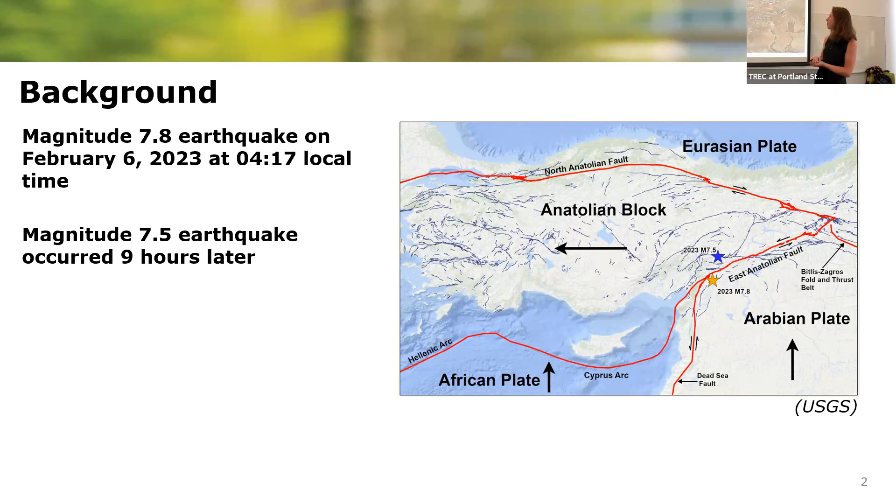So with these earthquake events, like I said, magnitude 7.8 and then 7.5 nine hours later, and in addition to that, numerous aftershocks. Here I'm showing the faults that ruptured and where they are in the context of Turkey, which is outlined here.

Seismology is not my background, but one of the big takeaways I've garnered from reading and listening to presentations on this is that this is very much an unprecedented event. Some folks consider this a main shock and an aftershock, but really it's two major earthquakes that occurred very close to each other.

When a rupture occurs, the first rupture, the 7.8 event, started here and then propagated in either direction, north and south. The second event on this fault up here propagated kind of east to west. I'm not going to get into it today, but the direction of propagation along these faults does affect the seismic response, which is something that gets considered when evaluating earthquake hazards: what are the different rupture scenarios we can have. If we know there's a fault and the type of fault, where is that rupture going to initiate, and then how is it going to propagate?

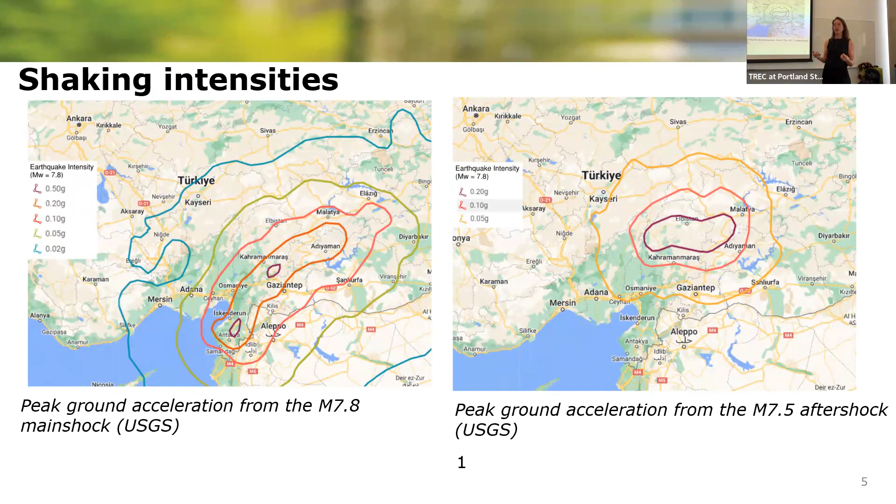This is the second event, which was more centered around Kahramanmaras and in the north part of Turkey. The bottom line is that there were some areas that just had one strong shaking event, and there were some areas that had two very strong shaking events.

So I have to touch on just the extent of loss of life and damage that occurred from these earthquakes. It's just under 60,000 people in total that died, both in Turkey and Syria. I took those values from Wikipedia, so I don't know how vetted they are, but it seems to be in line with the way the numbers were marching up in the days and weeks following the events.

There were widespread ground failures, liquefaction impacting structures, bridges, lifelines, ports, and dams. I'll be touching on a little bit of this, but we saw on those maps the large extent where the severe shaking took place, and so damage was spread throughout Turkey and Syria.

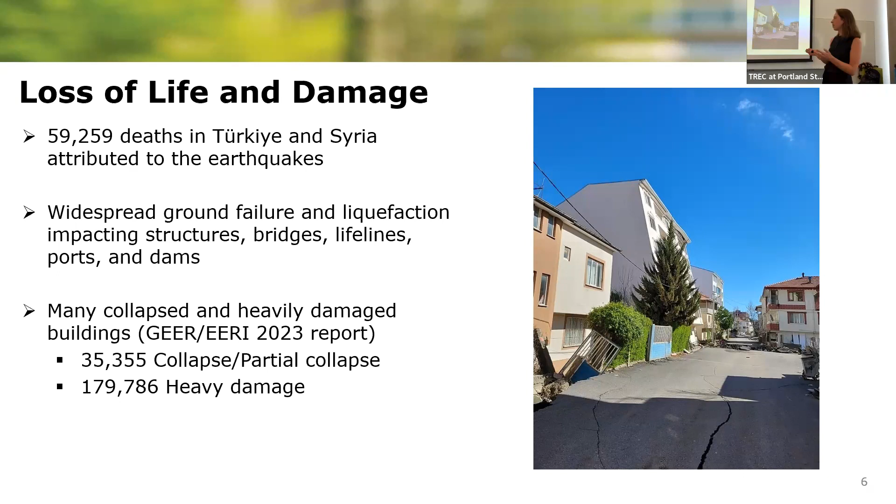The reconnaissance efforts I was part of belong to a group called the Geotechnical Extreme Events Reconnaissance Association, GEER, in partnership with researchers at Middle Eastern Technical University and the Earthquake Engineering Research Institute, EERI. GEER focuses on the geology and geotechnical aspects. EERI does a more comprehensive effort looking at impacts to hospitals, lifelines, and transportation structures, and does a very nice job of pulling together the different disciplines to understand the full effect and full impact of these earthquakes.

GEER sent three teams in the days and months following the earthquake. The first team is a small team that goes in within about the first week after the major response has happened, to get a big overview of what's happened, and then sends in the second team to do more detailed measurements. We were part of the third team, which can again pick up even more detailed measurements.

The idea and the goal is to collect perishable data on ground failure, infrastructure performance, and fault rupture that will create case studies for engineering, which are the basis of our engineering practice, so we can learn from these events and inform future practice and design. So we need to get there fast, when it is safe to do so and when we're not impeding emergency response efforts, to collect this data.

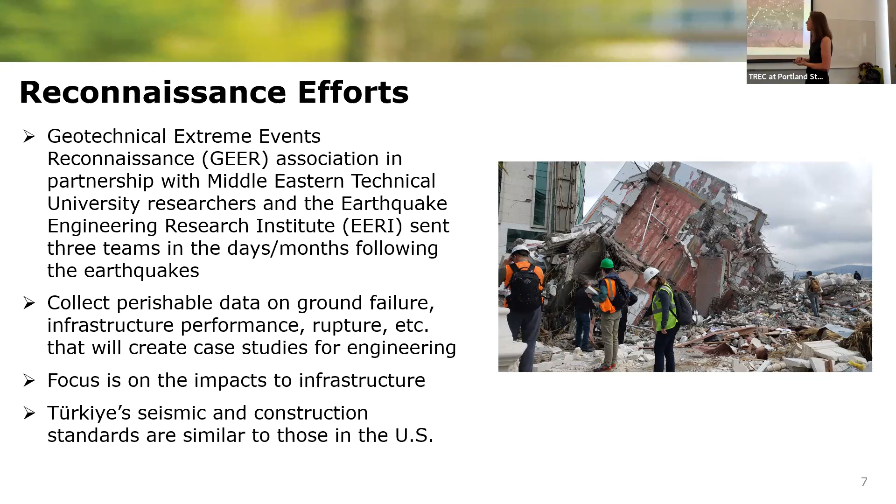This is our team, made up of 4 folks from UC Berkeley, Ohio State University, and Sena, who is from Zeytaş Engineering in Istanbul.

We focus on 3 areas: Iskenderun, where we spent about 3 days down on the Mediterranean Sea; Antakya, down south, which was covered quite a bit because there was a lot of structural destruction in the city, quite widespread and quite impacted; and up north in Gölbaşı, where there was a lot of liquefaction and interesting things we can learn from that city as well.

So what I want to do today with this presentation is provide some observations of geotechnical, transportation, and seismic interactions that we observed. This was just a few months ago, so we're still processing and learning lessons from these earthquakes. For the most part, these are very preliminary.

We're also planning to go back to collect more data from the subsurface that you can't really collect when you're there with just a week's notice trying to gather as much perishable data as possible. We plan to go back to collect data that isn't at as high a risk of being lost, but is still very valuable for understanding what happened during these earthquakes.

I also want to highlight some novel geotechnical earthquake observations, things we haven't seen or rarely see, and relate these back to how we can think about earthquake risk and planning in the US, particularly in the Pacific Northwest, some parallels between Portland and what we saw in Turkey.

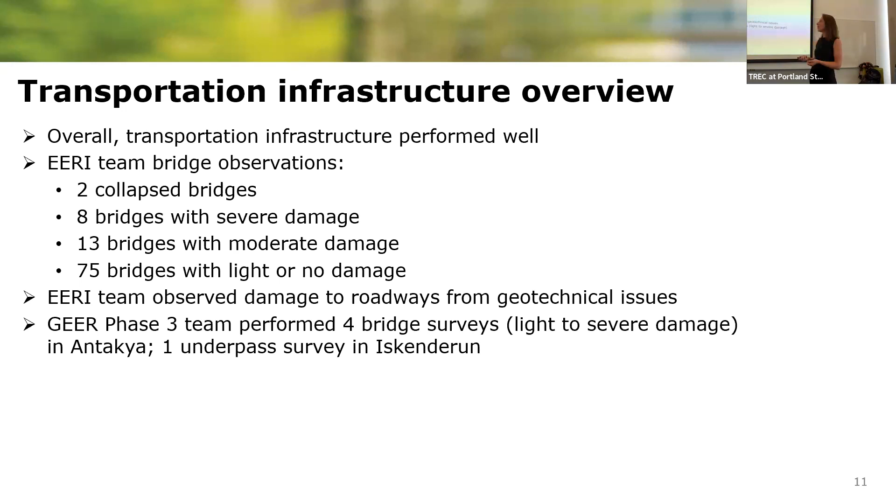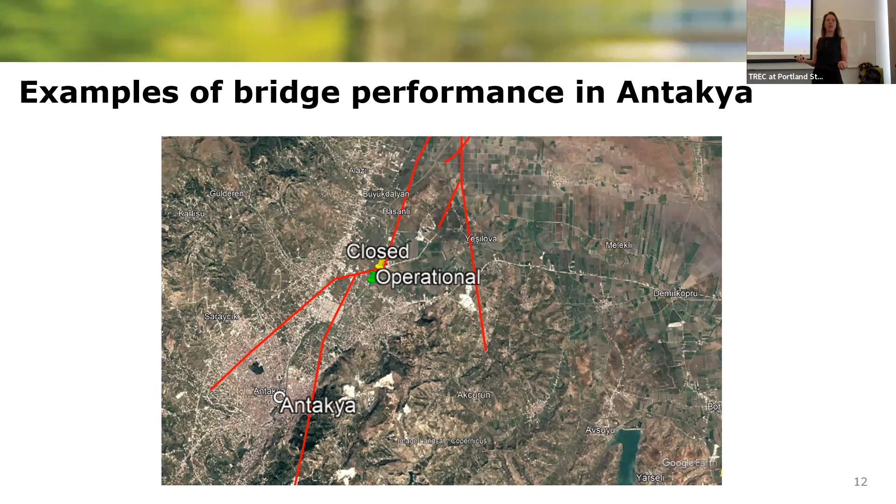I chose to highlight 2 bridges near Antakya to start, one that remained operational in the days following the earthquake and one that was closed, so we can compare their performances. This is the operational bridge, on a fairly major roadway into Antakya, with a twin bridge alongside it. They seem to have similar design and construction between the two bridges.

This is the survey we did at the bridges, with various measurements—it's a lot to absorb right now, and I don't expect you to take it all in, but I'll highlight some things. This is an image from Google Earth. At the abutments onto the main deck of the bridge, there is road patching that took place. It's quite common to see—I'll show several examples from different bridges—where the approach abutment settles during the earthquake, making it so vehicles can't move across. If there's a quick response of patching, the bridge becomes operational, as long as that's one of the only issues, or the other issues remain minor.

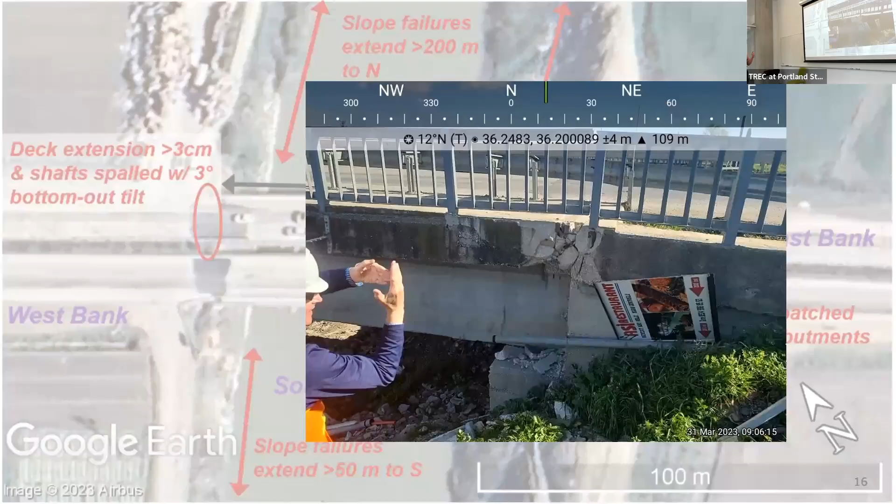With this bridge, we also saw compression of the deck and the abutment moving into the deck. It remained fairly minor, and as you can see, this bridge is operational.

We saw slope failures—we're talking about geotechnical engineering here—both to the north and south of this abutment, on either side of it. We can see the slope that moved and failed on either side, which puts force onto the abutment and causes part of that rotation and compression of the abutment and bridge deck.

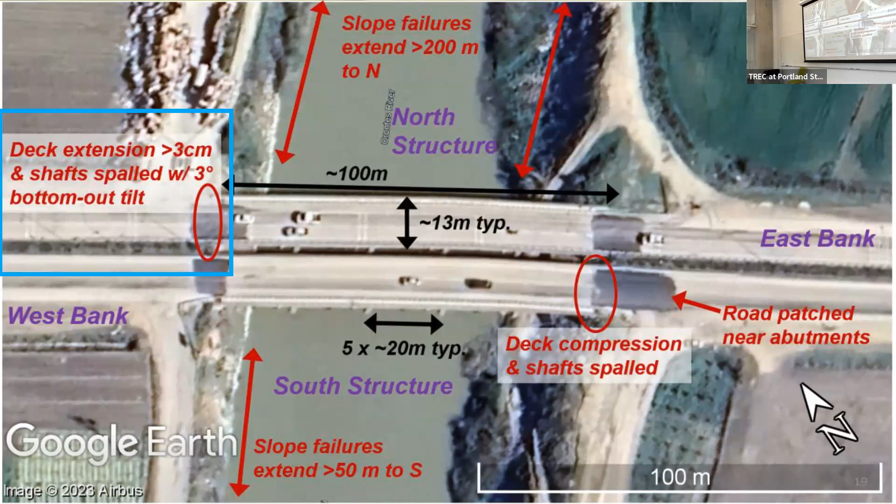There was deck extension and shafts with spalling. These are the shafts, part of the foundation of those abutments. We saw damage and concrete spalling at them, and then also some compression and tilting of the abutment and deck. But overall, this bridge did appear to perform fairly well and was operational in the days since.

This is the second bridge that we went to, fairly close by, so a similar seismic demand at this bridge. This bridge is the one that was closed. Also a twin bridge on the other side, similar construction and design. What I'll point out here is that it was very close to the stadium in Antakya.

This stadium, you can see in the parking lot here, this was taken in the days following the earthquake. It became an emergency response base and a place to house displaced people. Having this bridge closed and not operational was, from my perspective, an issue for moving people and goods in and out of the stadium. There became quite a long route around that they had to take to get there. And you also saw people just crossing barriers, saying it's just faster to go across this closed bridge. So there are still these impacts to people and movement that we saw in the days since.

Surveying happening at the bridge as well. Like I said, it was closed, and we did see the structural issues for it being closed. These appeared to be mostly structural reasons for closing the bridge. The geotech impacts didn't seem severe. It just seemed like the bridge was shaken very hard and wasn't able to withstand that shaking.

You see the structural elements here that failed. The struts across the bridge were compromised, and the structural components were compromised on the bridge. There are also bearing pads beneath these struts that sit between the abutment and the strut. During the shaking, a lot of them seemed to be displaced, and in some cases were just spit out of the bridge and were on the ground. So it was just concrete on concrete.

There were some geotechnical issues at this bridge where we did see again some slope failure along the river. You can see the leaning transmission towers in the background, indicating that the slope did displace and had rotation. Then just at the bridge, there were other things we surveyed, like a drop between the deck and the abutment and a gap between them. You can see the displacement and the offset here.

This bridge does show us where there were some geotechnical issues around it that, at this point, I can't say whether they contributed to the bridge's poor performance. Actually, I think I can say there are some — we do see these geotechnical failures that are then impacting transportation infrastructure.

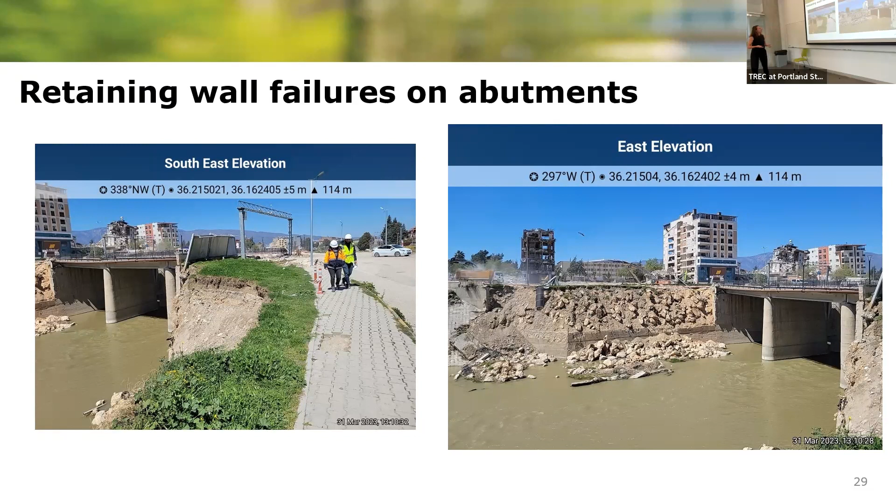Again, the drop between the abutment and the deck, where if everything else is performing well and then this happens, you are not getting vehicles across the bridge. You can see that there's almost like a makeshift approach developed here in a lot of cases. And interestingly, we did see these kinds of efforts undertaken where there was collapsed building and rubble covering a road, and folks just kind of create their own road across that rubble.

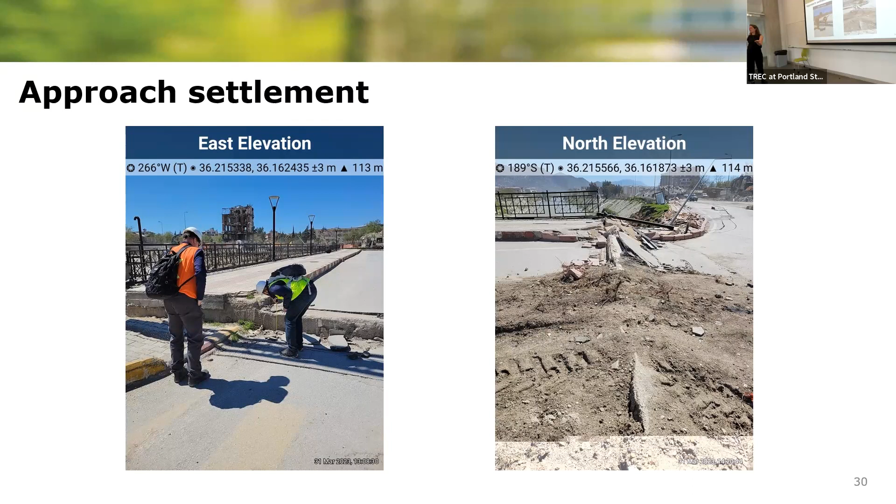This is another bridge that actually we didn't survey. We didn't go to this bridge. It was too close to the Syria border for US citizens or permanent residents to get close to. But a contact I have at the Canadian reconnaissance team, they did go survey this bridge.

And this bridge is a case where it looks like geotechnical failures can be tied to the performance of the bridge. I'm going to explain what liquefaction is in a moment, but just these sand boils here are an indication that liquefaction took place and that it is a contributing factor to the performance of the bridge.

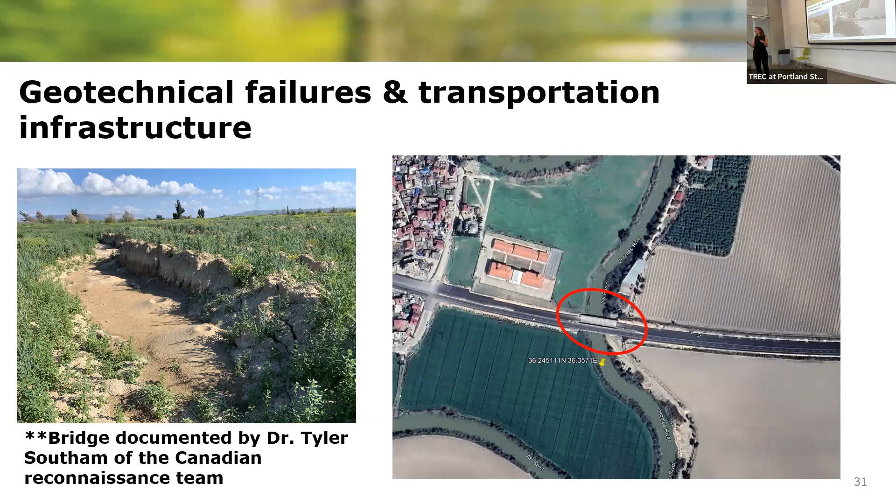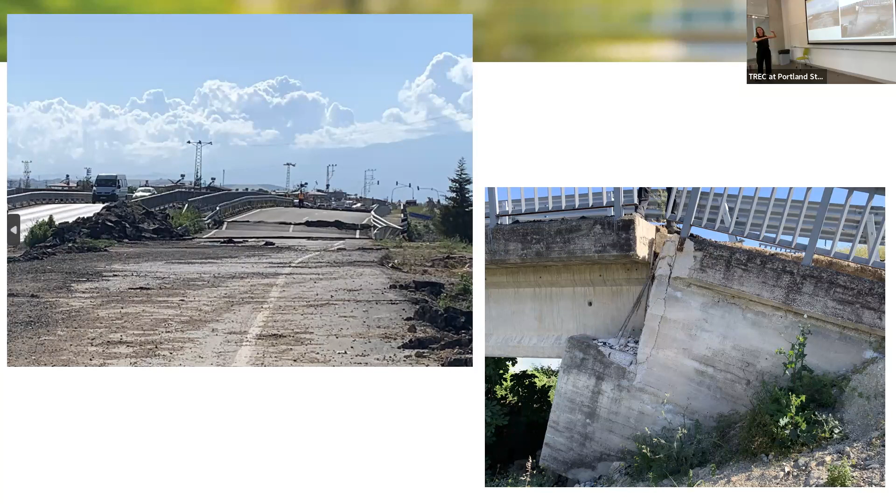And then this is another picture of the bridge where you can kind of picture that the failed slope has moved into the bridge and caused all that force and loading that then failed it. And this is looking at the approach and the abutment, the tilting of it. So that's kind of what I have on bridges for the most part.

What we saw in Iskenderun: widespread liquefaction, lateral spreading. Like I promised, I will discuss liquefaction in a moment. It induced building settlement. We saw an increased flood hazard post-earthquake, many collapsed buildings, and damage at the port facility. And I'll discuss all of these.

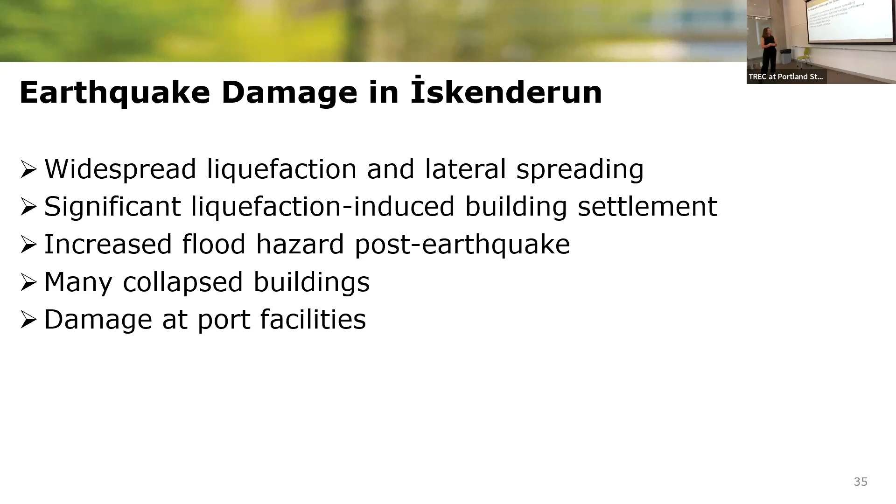So what is liquefaction? When we have sand that is loose and saturated with water, during earthquake shaking, that sand wants to get denser. You think of a jar of coffee beans, you want to fit more coffee beans in it, you shake that jar, those coffee beans settle, and now you can put more in there. Same thing happens with sand when we shake it in an earthquake. That sand wants to get denser. But earthquake shaking happens so quickly, and there's water in the way, so it can't get denser. You can't compress water. Water doesn't have time to flow out.

So instead, those particles, instead of actually getting denser, they just end up suspended on the water. They're putting their weight on the water. So no longer do we have sand particles against each other, developing strength. Now they're just on water. Water does not have shear strength and it just flows. And our soil acts the same way. It flows and it acts like a liquid. It no longer has shear resistance. So during liquefaction and earthquake shaking, soil completely loses strength and stiffness.

And I have a demonstration that I like to use. It's just a bucket of sand full of water. There's a brick on it, just like a building. Oops. And actually, I might need to trigger this. Yeah, so the hammer comes along. The hammer is the earthquake. And you can see in the bucket, you see water coming to the surface. You see that sand kind of acting like a liquid, and our brick building is settling and tilting.

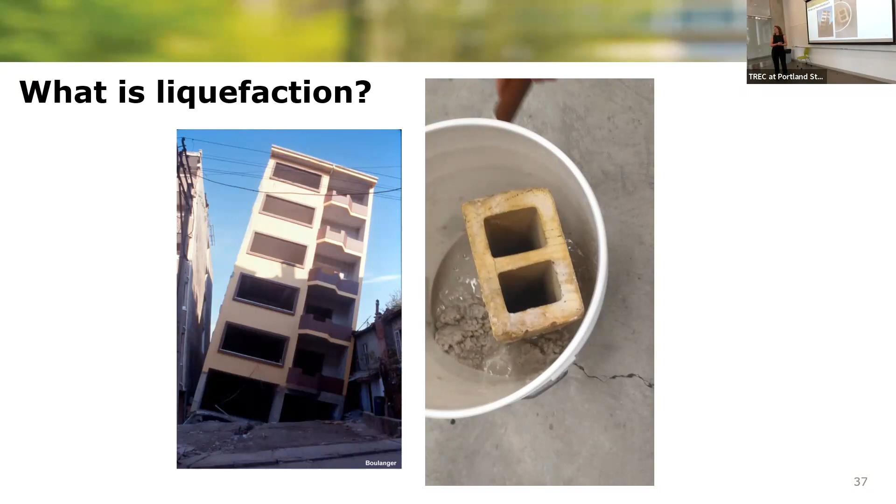So what do we see when we see liquefaction from an earthquake? We see sand boils and surface water. We see lateral spreading where soil loses its strength. So if it's on a slope or there's a river nearby, it just flows out that way, there's no longer resistance. The sand boils are because at depth, that sand or that soil becomes like a liquid and it wants to relieve pressure. It flows upwards, takes the sand with it. So this is a sign we often get that there was liquefaction in an area.

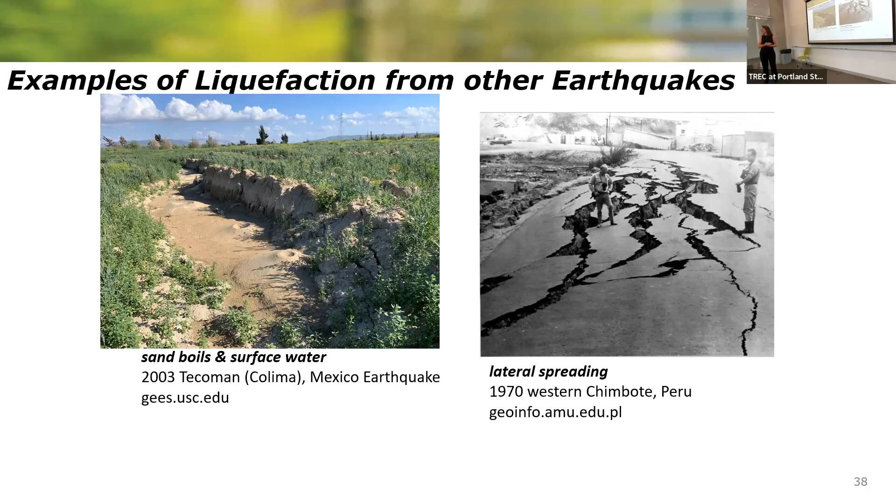And remember at that bridge down by the Syria border, there were sand boils - evidence of liquefaction that occurred at that bridge. And we saw lateral spreading at that bridge impacting the structure.

More examples of liquefaction from other earthquakes. I feel kind of silly including these slides because there's plenty of examples from this earthquake, but I hope this shows you that this is not an isolated phenomenon. Liquefaction happens during earthquakes, and it is something we need to be concerned about here in Portland in the Pacific Northwest.

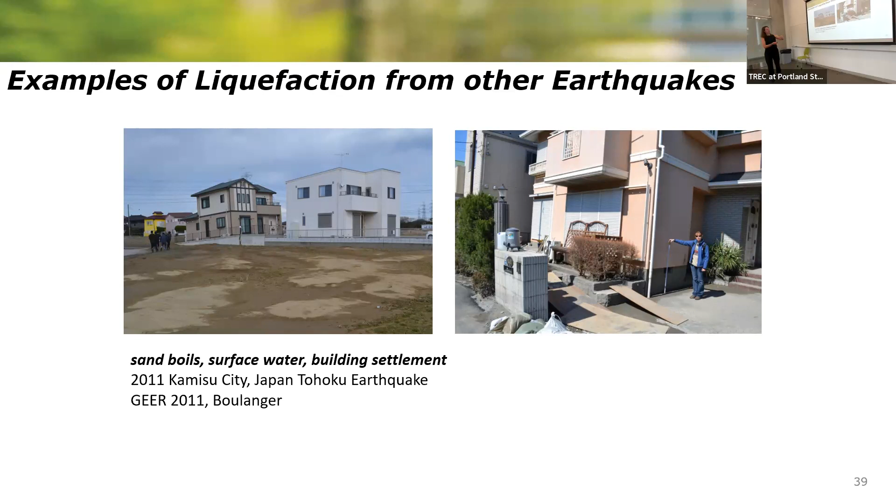These are from the 2011 Tohoku earthquake in Japan. You can see widespread liquefaction ejecta that occurred in this residential neighborhood, and you can see the tilted house in the background. This is showing a house that settled, or the ground that settled - it looks like this ground settled relative to this house.

Bridge failures from liquefaction - there's several classic examples of it, from 1964 in Niigata or 1995 in the Kobe earthquake. And actually there's several from the 2010 Chile earthquake. There's several examples.

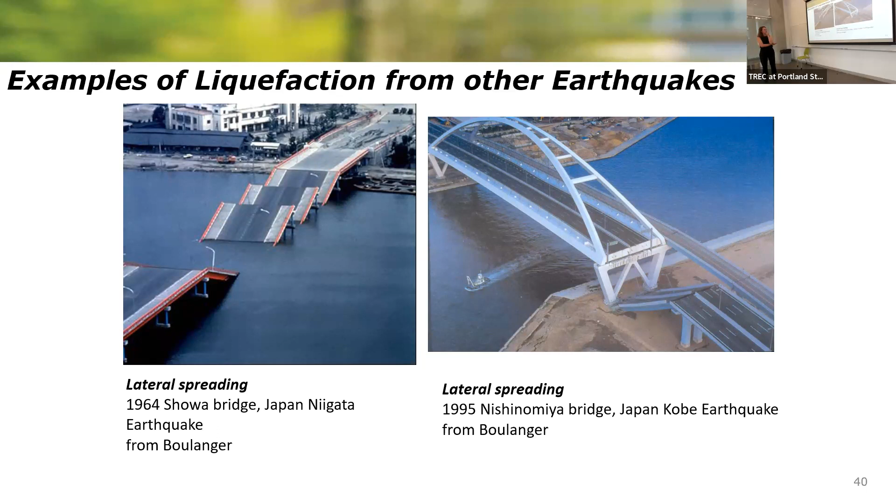So back to this earthquake, back to Iskenderun. I mentioned that Iskenderun is a port city. It was largely developed in the 20th century; prior to that it was still a port, but it was described as a very swampy city, difficult to settle and difficult to live in because of poor drainage in general. As part of the development in the 20th century, they built drainage canals, drained the city, filled in that land, and then also started to build out the shoreline to really build up this port city.

I like to include this example to show that development. This is a building that we surveyed during our reconnaissance, I think built in the 1930s or so - you can get a sense of the age of the building, sitting on a major boulevard in Iskenderun that runs close to the coast. This is the same building back in 1960. Oh, I guess the building's older than I said.

Anyways, back before Iskenderun was really developed, you can see that it's on the old shoreline of the city. So that shoreline has been built out and the land has been pushed out in Iskenderun.

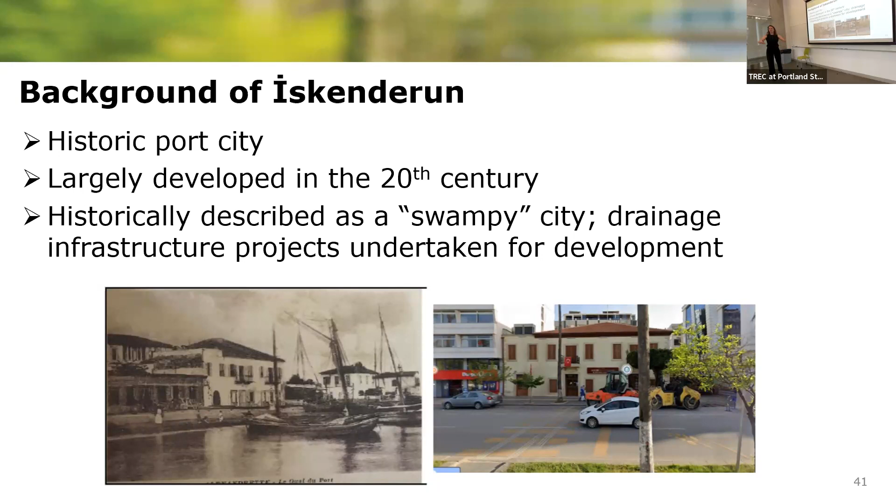This is an overview of the areas that we surveyed. The takeaway from this figure is the hatched area - based on historic maps like this one, this hatched area all along here is our interpretation of where the land has been built out and where they've extended and put fill down for development.

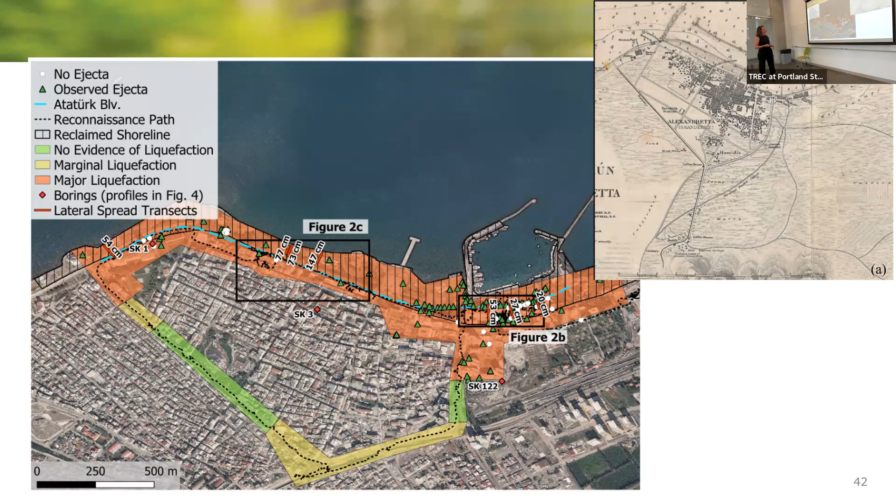Why I want to impress on this reclaimed land is that in the red zone is where we saw a lot of liquefaction, and the symbols are where they saw liquefaction ejecta. So on reclaimed land we'd expect very poor performance for liquefaction, and our observations in Iskenderun were consistent with that. We saw a lot of building settlement, a lot of liquefaction and ejecta, consistent with the historic shoreline and reclaimed land.

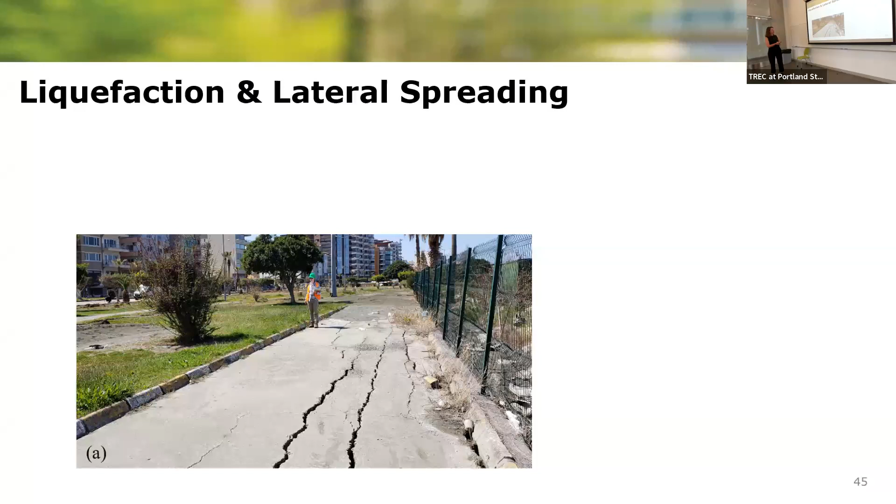Some examples of liquefaction and lateral spreading - we saw damage on sidewalks and roadways. These are pictures of lateral spreading and damage to roadways, ejecta that covered large areas of land. These are photos, I believe, that one of the first teams got from residents in the area. You can see the ejecta was very widespread - it covered roads and prevented mobility and response in the hours following, just with the amount of liquefaction ejecta that covered the roads.

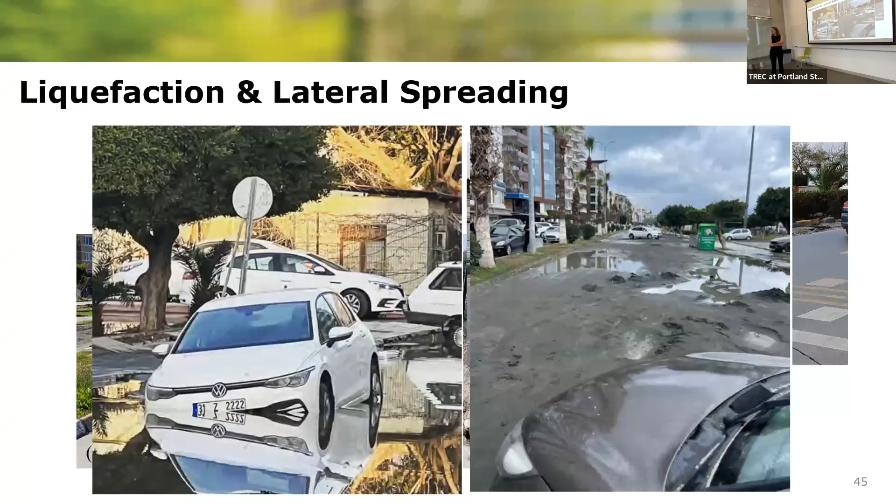Then there's the port of Iskenderun, the second largest port in Turkey. There was quite a bit of damage at the port. Ejecta and lateral spreading were observed, so we do know that liquefaction occurred at the port.

The port did not function for a period due to misalignment of the cranes. There was also a very large fire in some of the cargo containers following the earthquake, reported on by several news sources. You can see that on Google Earth as well, with imagery showing when the fire started and when it had been extinguished. So ports are something we do need to consider as a geotechnical challenge for earthquake performance.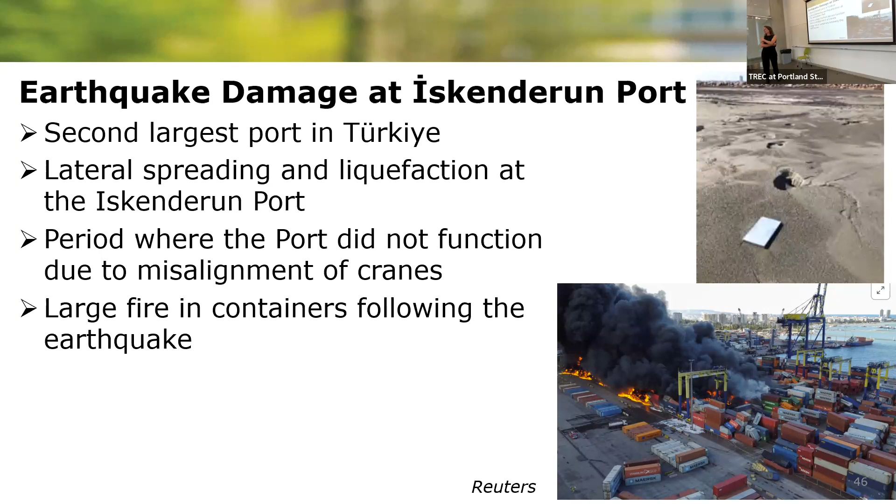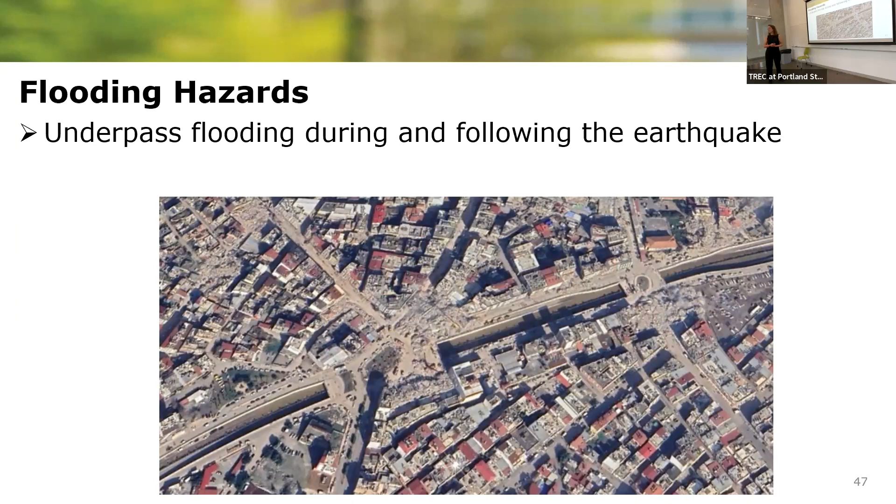There was also an underpass in the south part of Iskenderun. In Google Earth, we saw that it had flooded in the days following the earthquake—you can see the water at the bottom of it. Our thought is that liquefaction occurred at depth. It didn't really impact things at the surface, but that pressure relief and buildup of water relieved itself in this underpass, limiting transportation due to flooding. We surveyed it while we were there and there wasn't any apparent damage to the underpass itself; it performed quite well. It was just this flood hazard in the days following the earthquake.

From talking to local residents, we learned that flooding is now much more common in Iskenderun than it ever was before. This was March 29th when we were there, and there was flooding several blocks back in some areas of the city center. One of the main roadways is just here on the other side of these buildings—that's actually the community center I pointed out a couple slides ago.

Our thought is that liquefaction took place in Iskenderun, with such significant settlement that the area is now at a lower elevation regionally, making it much more susceptible to flooding. So it's a really interesting co-earthquake hazard that's continuing in the days, months, and likely years following the earthquake.

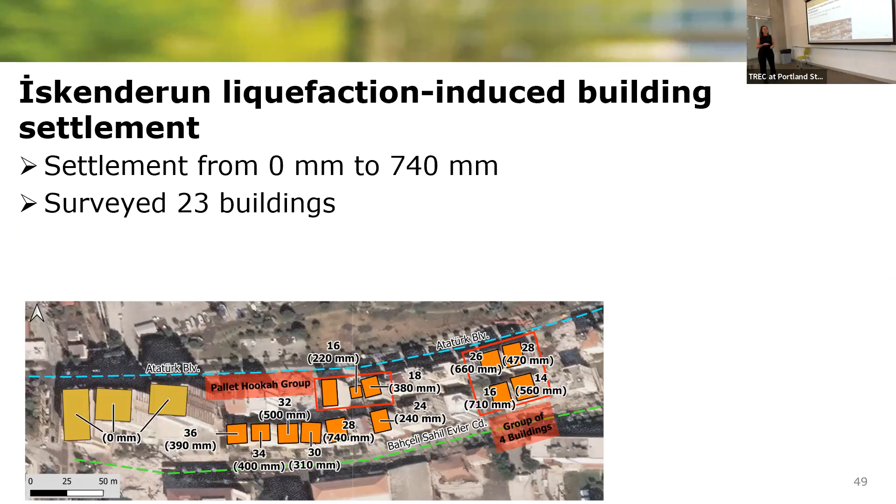We spent a lot of time looking at buildings. These don't apply directly to transportation, but I think they're very interesting. We surveyed about 23 buildings in Iskenderun to measure their settlement, seeing settlements ranging from 0 millimeters all the way to 740 millimeters, with significant liquefaction-induced settlement in an area called the Chai district, which is almost entirely on reclaimed soil—some folks used to call it the swamp for development.

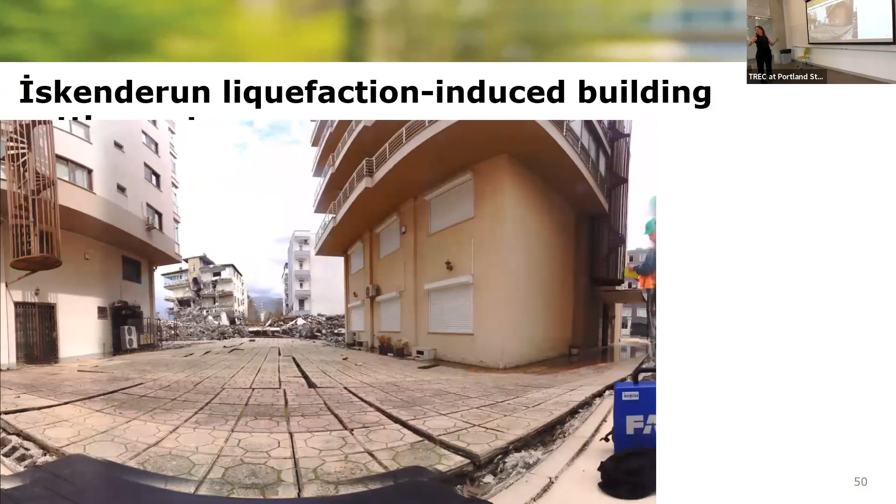These four buildings were particularly interesting. What you see between them is that the ground has mounded, where we're assuming it used to be relatively flat, maybe with a slight gradient out to the streets for drainage. But we see this mounding between the buildings, and also in the ground tiles showing extension that's taken place. You also see floodwater pooled around those buildings, indicating settlement.

We had a LiDAR device out there to measure the ground and buildings, and again you can see that distinct curving pattern of the ground between these buildings in the LiDAR data. We had settlements at the buildings up to about 70 centimeters, and in some about 25 centimeters. The hypothesis is that the buildings on either side settled and seemed to drag the ground down between them. But it usually isn't documented that there's this significant building-ground interaction from earthquakes, so this was quite interesting to see.

This is a schematic of what we expect happened: the buildings settled and dragged the ground down around them, and because there are buildings on either side, we see this bending or hogging deformation. There's another set of buildings where we saw this—two buildings settled, and this light steel frame building in the middle, the hookah bar, didn't seem to be directly impacted by the liquefaction, but you can see the ground bent underneath it due to settlement of the two adjacent buildings.

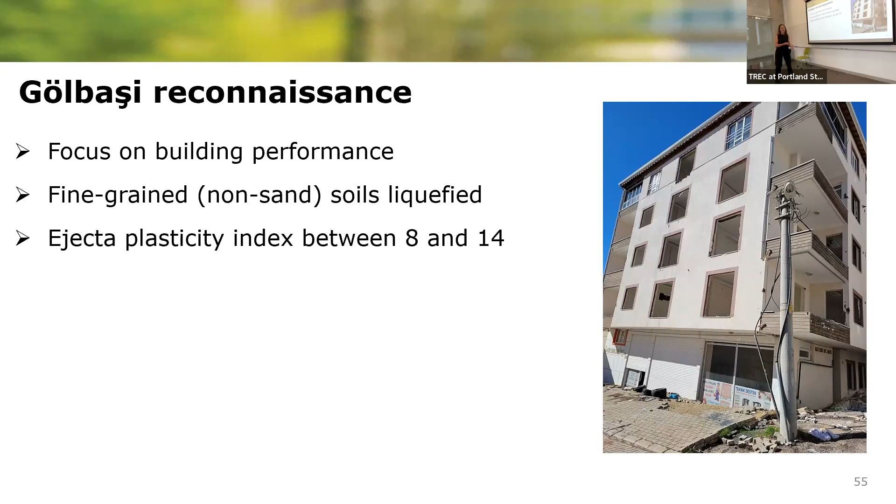This is just an overview, looking down a street in Gölbaşı, where it looks like not a single building is unaffected by the earthquake, and we see different degrees of performance.

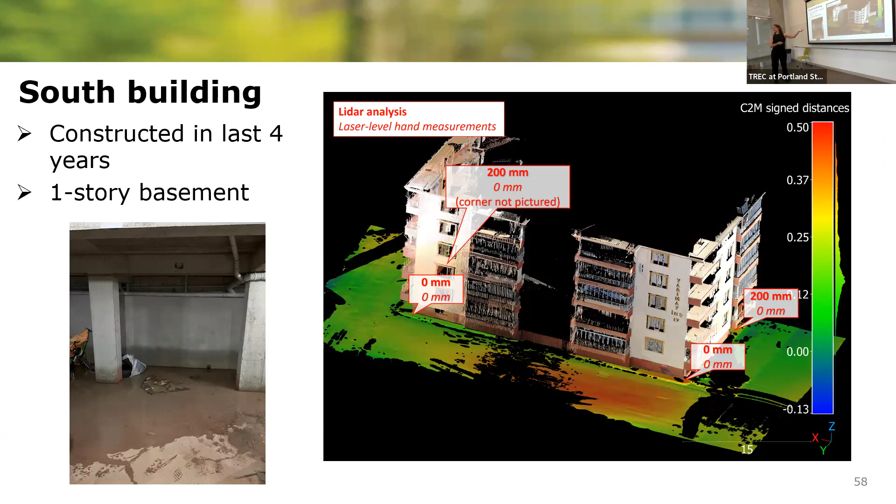This apartment building - there are two apartment buildings, very similar setting, very close together. One building to the south had about 200 millimeters of settlement, maybe even less depending on how it's analyzed, so it performed very well. People were living in this apartment building. It had a basement.

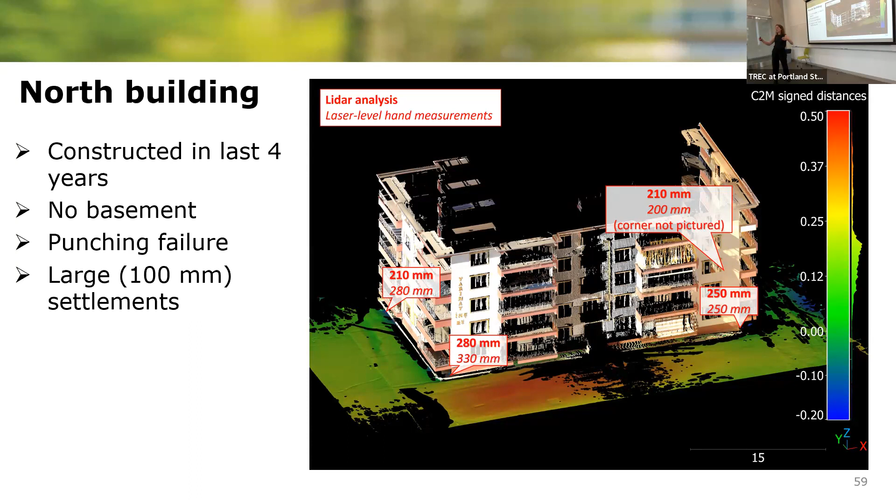Then we look across the other way, a building that did not perform as well. It had about 250 millimeters of settlement overall, which is considered significant, and no one was able to live in this building following the earthquake. This one did not have a basement. So again, we see similar seismic demands, similar age and construction between these buildings, but that difference in foundation conditions meant one building could still house people following the earthquake, the other could not.

Now I'm just giving some last thoughts here. Another thing I want to point out - I'm jumping down to Antakya, where we went to visit a hospital. I don't know much of the history of the hospital, relatively new.

I think it was built following 2010 - new hospital, lots of glass up on the hill, looks very modern. It was shut down, this large hospital, and a lot of the emergency efforts were now happening in the parking lot following the earthquake. I'm not too sure what structural components or what caused the hospital to be shut down - I don't know that information.

But what we did see was that there were a number of things that should be fairly simple and should perform well that can hinder emergency response following an earthquake. We saw entrances, ramps, stairs that had failed. This is the emergency entrance, and we see the ground had differentially settled, where you're not going to be able to get an ambulance to back up over that following an earthquake.

We also saw settlement around utilities as well. These are things that as engineers we can engineer - fill, entrances - and they shouldn't be afterthoughts, they have impacts. As I was discussing with my geology colleague, there's concern that if this happens at a fire station or other emergency response structures, you're not going to be able to get those vehicles out to respond. So these kinds of details do matter, and we need to pay attention to them.

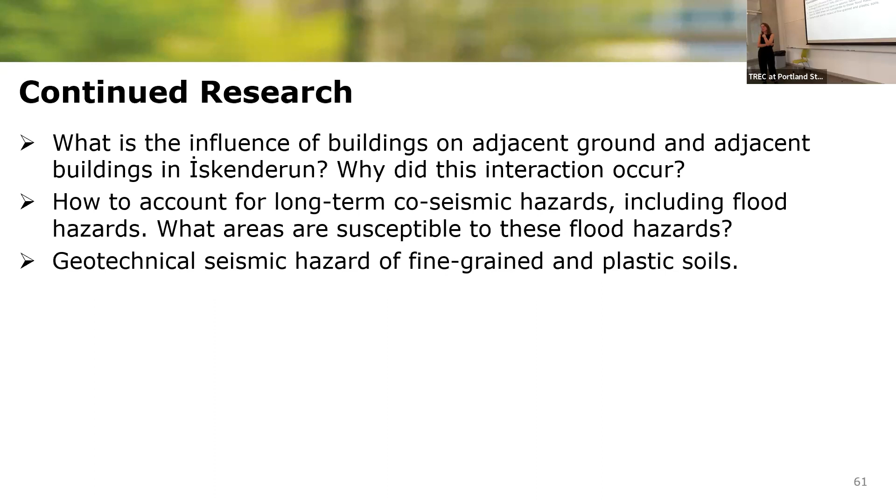Continued research following this, like I said, the influence of buildings on adjacent ground and adjacent buildings is quite interesting. What was it about this setting, this earthquake, that we're able to observe that we haven't observed in other settings? How to account for long-term co-seismic hazards like flooding, and what areas are susceptible to this kind of flood hazard following an earthquake. And then also the fine-grained and plastic soils and the liquefaction we saw in Gölbaşı, that's interesting for us as additional case studies and information that can be carried forward to our practice.

So I sat down to think about how this relates to Portland and the Pacific Northwest, and my mind always goes back to the CEI hub, the Critical Energy Infrastructure Hub on the Willamette River. This is where most of Oregon's fuel is either stored or handled - fuel which we'll need following an earthquake to recover, but which can also spill into the river and ignite, hazardous to the community of Linnton just up here. This flat land along the river is all reclaimed land and fill for the most part. We already know there's a big hazard on reclaimed land for liquefaction in earthquakes, but it's a good reminder that the CEI hub is at significant risk.

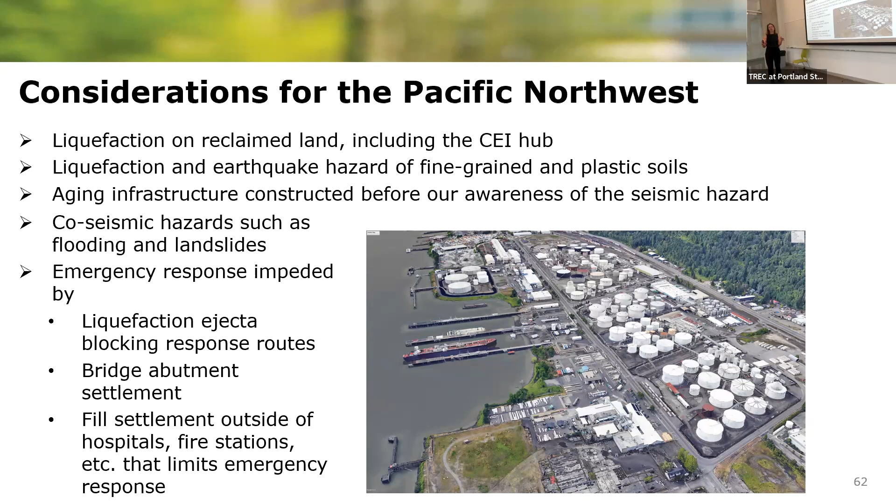Liquefaction and earthquake hazard of fine grain and plastic soils like we saw up north in Gölbaşı - lots of fine grain and plastic soils in the Pacific Northwest that we're concerned about. Aging infrastructure constructed before our awareness of seismic hazard - I think we all know this is important to consider. Co-seismic hazards such as flooding and landsliding in the West Hills, blocking up transportation routes. And emergency response impeded by liquefaction, ejecta, bridge abutment settlement, and fill settlement outside of firehouses, hospitals, etc.

So I want to leave off on this: if you want to learn more about earthquake response, the Earthquake Engineering Research Institute is a great organization. I was involved with it all through grad school - lots of opportunities for students. For earthquake reconnaissance, they mobilize a virtual reconnaissance team that gathers data from Twitter or news sources in the local area, which then gets fed to the on-the-ground team so they're directed where to go. The virtual reconnaissance is a great opportunity for students to learn more, and there are several earthquake hazard research projects happening at PSU you can be involved in. Just acknowledging the team, the NSF funding, and EERI as well that supported this reconnaissance.

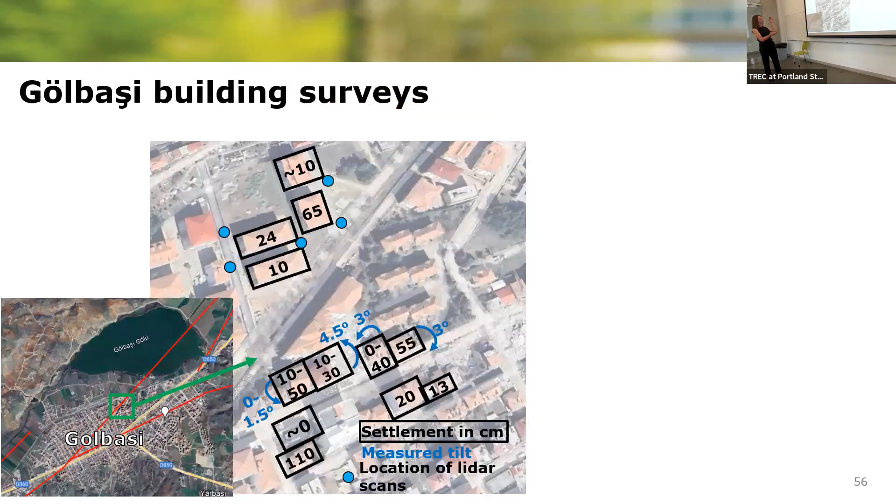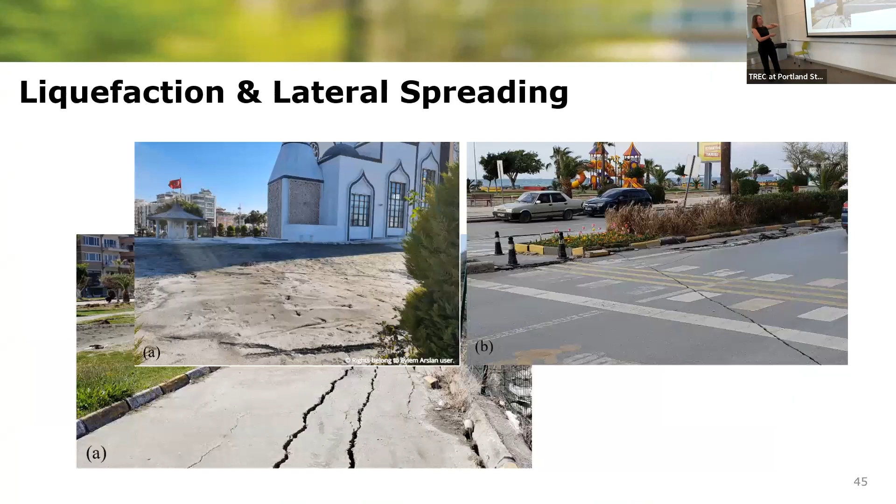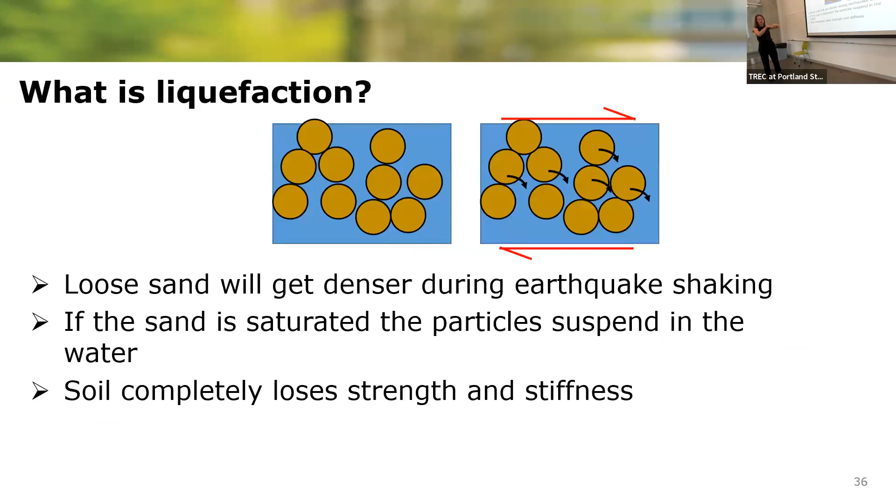I'm curious if you observed any impacts to rail infrastructure. Well, that's a good question - I didn't, but I think there may have been some rail infrastructure impacts. The EERI GEER report is available on the GEER website and does a very thorough job documenting various impacts. The first folks were able to fly a plane to get a bird's eye view of what happened, and I think there may have been impacts to rail due to rupture of the faults that offset things. More up in this region you'd see misalignment of rail tracks, but I'll refer you to the report to get an idea of that.

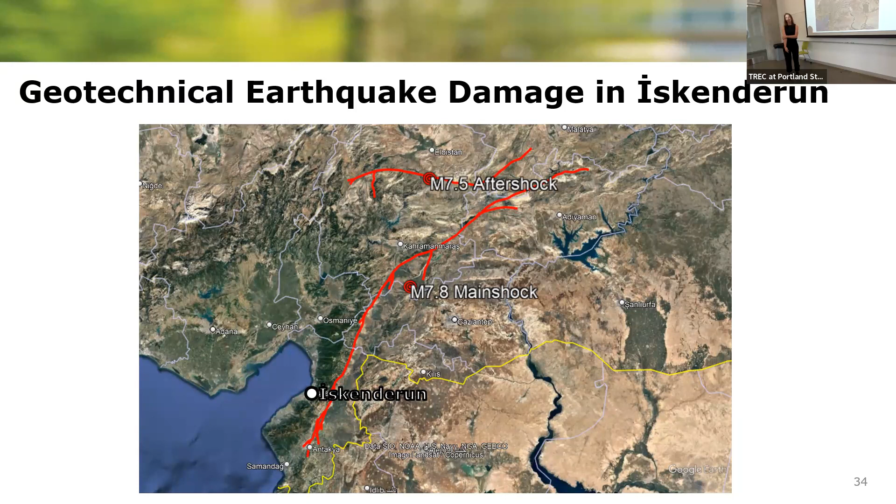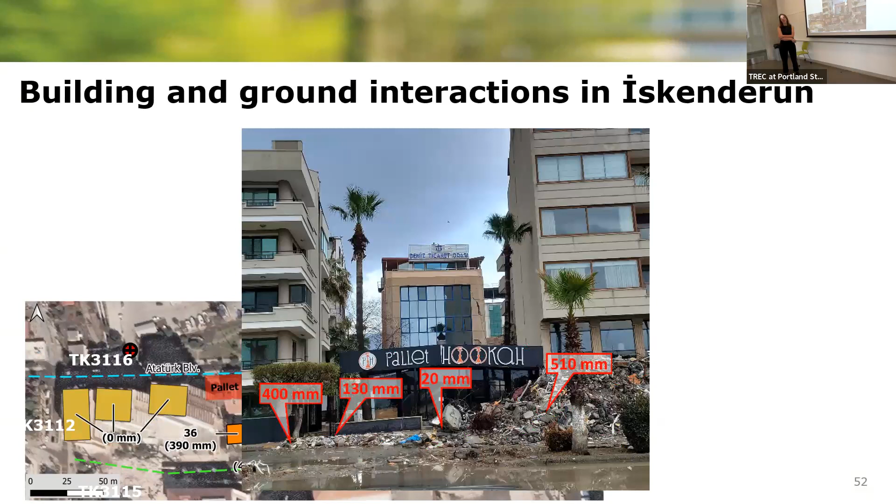So you talk about different infrastructure, especially different bridges performing rather differently even when very close to each other. And then even apartment buildings that are very similar, but on the other side of the street. So what are your hypotheses for why such a difference? And then maybe related to that, I think you alluded to when talking about the hospital - is there a way engineers, when we construct the building, can ensure that even if the building stands, we can do a better job making sure the ground still holds during a major earthquake? Can you elaborate on that?

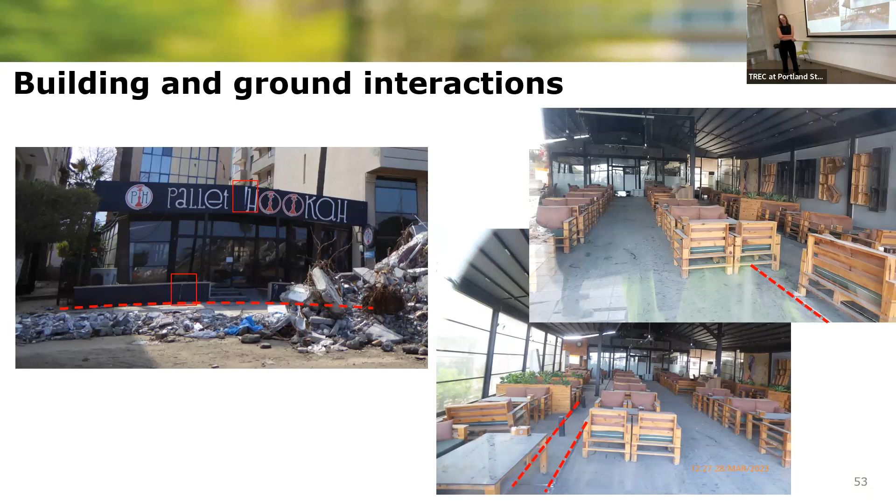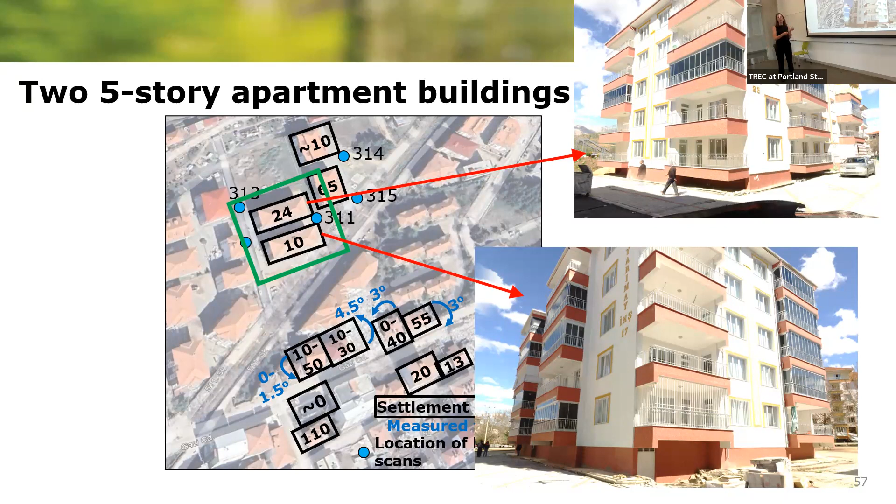Yeah, so as far as the building performance between these two apartment buildings, it came down to foundation conditions. Buildings with a basement do tend to perform better, just because you've excavated out soil, and now you have a basement in its place. So you no longer have 3 meters of soil that can liquefy and settle - instead you have a basement. That's part of why at least these buildings appeared to perform well. You can also do buildings on pile foundations that tend to do quite well in earthquakes.

Here, these three buildings are quite tall, like most of these buildings are 5-6 story reinforced concrete buildings. These were like 10-12 story buildings that were most likely on pile foundations, and they performed quite well. This building here had relatively little settlement for the district, 240 millimeters, whereas in others we're looking at more like 400, 500. This one was on timber pile foundation. We were able to speak with the building owner, business owner, and that one performed quite well. So yeah, foundation condition. You kind of have to have it all, right? You have to have the right foundation, you have to have the right structure, and to have good building performance, you can't overlook one or the other.

And then I think as far as the entrances and fill settlement, that's just a matter of proper compaction. We as geotechs know how to compact soil, so it's just not overlooking that and doing the proper engineering. One thing that was pointed out to me is that you often see that fill settlement right near entrances and walls, and it's because it can be difficult to compact in those areas to get the machinery all the way out to the edge.

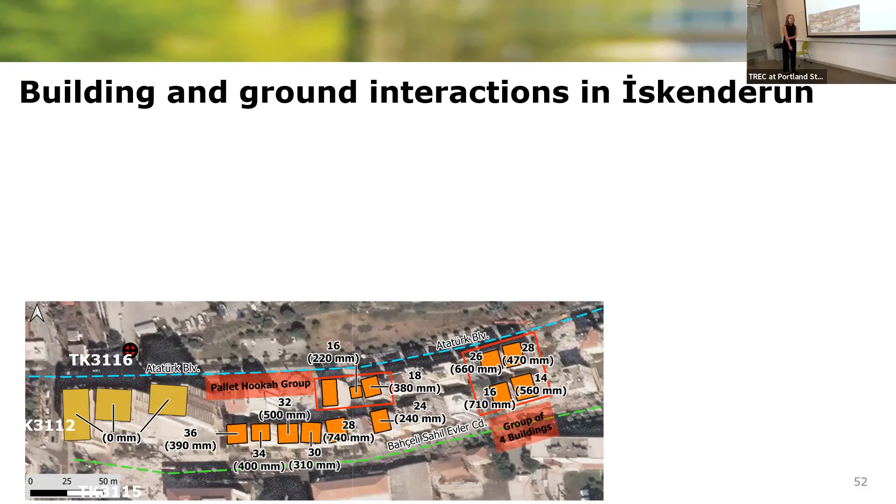A related online question, somebody's wondering what were the biggest differences for bridge failure—age, design, material? Pure speculation at this point. I don't know, it could be a lot of things. Like those bridges, even though they're close to each other, they were oriented differently. One may have been oriented like this and the other like this, and if shaking's happening in this direction, you're going to have different demands on the bridge. So it's a lot of things.

At the beginning of the presentation, you started with saying that the overall transportation infrastructure performed pretty well. I'm wondering how the utilities performed, because oftentimes utilities are incorporated into the street infrastructure, and I wonder how that works. I can't say, I'm not sure. I don't know, I'll refer you to the report, it may address that. I'm sorry, I can't answer that.

Another online question: somebody's wondering how developed the bicycling infrastructure is in Turkey, and if you saw any effects or impacts to that. I'm not sure. I mean, a few people on bikes, but not that many overall.

So I have a transportation related one. I don't recall how quick it was after the earthquakes that you all went there for reconnaissance, but by the time you got there, did your team experience or observe any transportation related issues? That's a good question. Trying to retrace our steps—there may have been. Sena, who was the Turkish member of our team, did all the driving, and I was either in the back seat looking at notes or sleeping. So there may have been detours and routes she took that I wasn't aware of. I feel like as we went from south up to north we may have had to take a detour, but I'm not sure. Yeah, it's all a blur, I don't know.

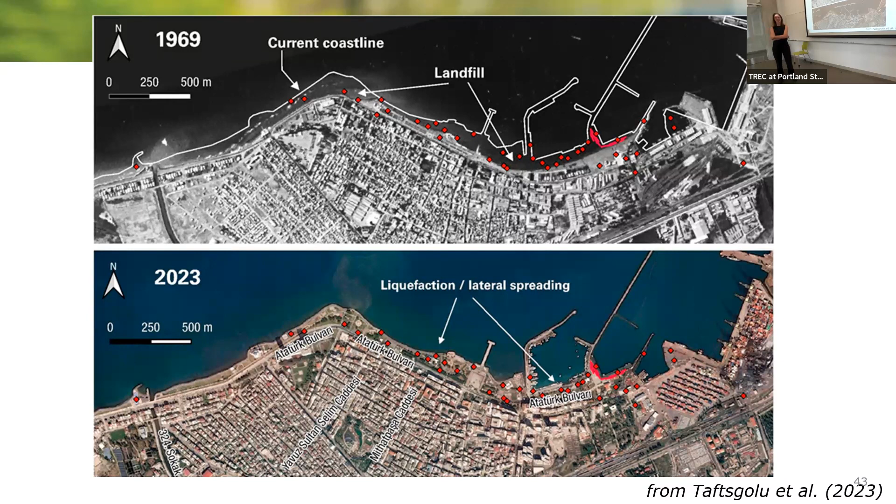I have one last question. So the earthquakes experienced in Turkey were sort of this movement, and the Cascadia subduction zone is going to be like this movement. So are there things we're going to experience that we're missing from this experience, or vice versa, things they had that we won't have? That's a great question.

I'm gonna go all the way back. The big difference, and it's actually not that different between these earthquakes, is that with these crustal faults, the duration and the magnitudes are lower, 7.8, 7.5. For the subduction zone, we're designing and analyzing for a magnitude 9. That's like over 10 times the amount of energy, since our magnitudes are on a log scale.

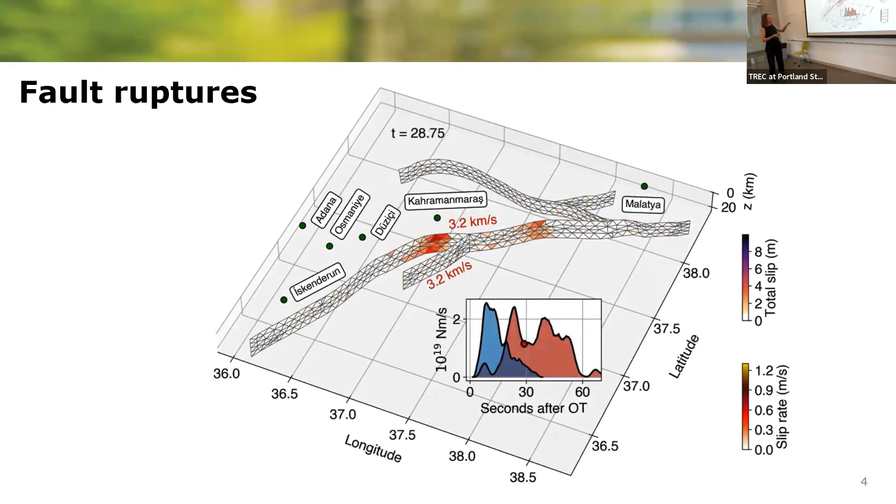At least here in Turkey, you can see that these areas were all very close to the fault, we had near fault effects. Portland is, I think, almost 100 kilometers away from the fault. But there's more energy, and as those waves are traveling, the paths can do different things.

One of the big things is these earthquakes lasted for about 2 minutes, which is quite significant. That's a very long earthquake, and if you think about 2 minutes of shaking, that would feel like an eternity when experiencing it. With a magnitude 9 subduction zone earthquake, those will last longer, they're known to be long duration earthquakes. I'm not sure what the estimates are, but it's like 3, 4, 5 minutes of shaking that would take place in those earthquakes.

Is it possible that all the flooding, you said it was most likely to settle in the area, and post liquefaction those particles reconsolidate, become more dense, or make it hard for water to seep through? I think at the end of the day it's still sand. We think about permeabilities, and if you can pack sand, it's still pretty darn permeable. We think about permeabilities on orders of magnitude, and you're probably at most getting like an order of magnitude difference, but it's still pretty permeable. So I don't know that that's quite it.